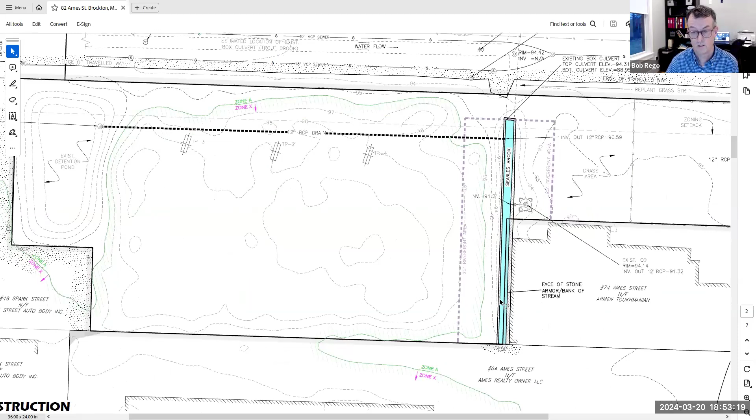So here's Spark Street and Ames Street, and the site is this irregular shaped lot. Searles Brook runs down the middle through that stone lined channel. There's a light gray line running along the perimeter of the property, and all of this area of the site is within Zone A. I determined the elevation to be 96 as the flood elevation. On the floodplain maps it's shown over here, but I think they were confused too, because Searles Brook is basically culverted beneath the ground for 1.5 miles upstream. It's all below grade and you can't really tell where the path of the stream is, but it does enter out here, and that's how I determined it.

What we're proposing to do is address the existing unpermitted gravel parking area, like a reprocessed asphalt parking area, at the intersection of Spark Street and Ames Street. We're proposing to redo that section with permeable pavement to allow stormwater to infiltrate into the underlying soil.

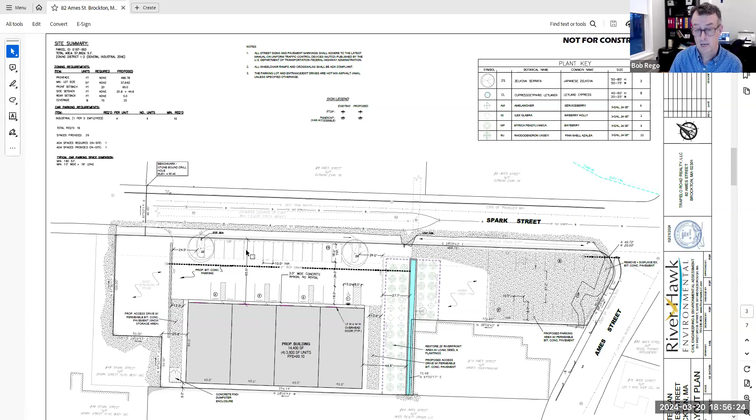In the front portion, that'll be regular bituminous concrete asphalt, going to a single catch basin at the low point, then directed through a water quality treatment unit into an existing basin on the westerly portion of the site.

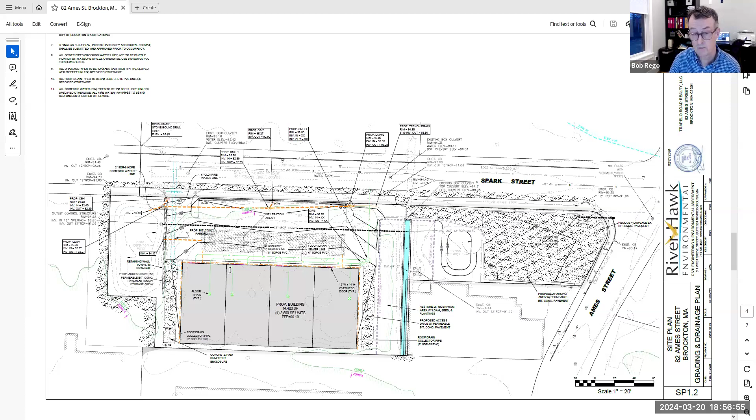All the roof runoff will be directed to a subsurface infiltration dry well in the front of the site, so that clean roof water is infiltrated into the ground right there. We've improved the infiltration of the site and managed stormwater up to the 100-year storm in accordance with Mass DEP stormwater management standards. That's about it, I guess.

And what would be overlaying that infiltration basin? That would be asphalt pavement. Asphalt over the top, yes.

And what's the condition of that retaining pond, over to the left side? It's in relatively good shape. It's just a grassed pond, kind of a little bit of a mystery why it's there and when it was built, but it does exist there.

There's an adjacent parcel with a limited amount of pavement which drains to it. That's an abutting property owner, so it's not their basin, but a small amount of water from their site does go to it. Other than that, it's interesting.

There's an overflow, and I'll go back to the existing conditions. Basically, there's an overflow structure in that basin, and it connects. There's an inlet on the side of it, in that granite wall. So it does overflow into the brook once it reaches the bottom elevation of that pond.

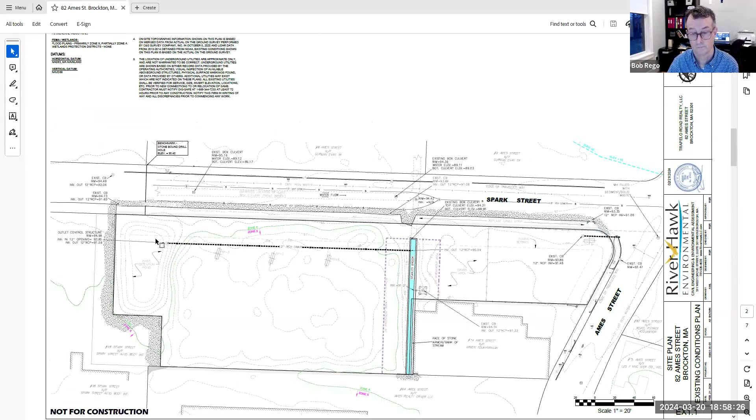Agent Holden? Sure, thanks, Joyce. Thank you.

Thank you, Bob, for that summary. I don't really have much to add to the site description. In my agent report, I reviewed the technical comments from DEP. I know, Bob, you did respond to Whitney, but that wasn't reflected in the agent report since it happened after I sent it out on Friday. That said, my recommendation still stands.

I think the commission should have Beta review this. There are stormwater standards that need to be met, and cut and fill calculations and compensatory storage that all need to be confirmed. So that's my recommendation. That's really all I've got. Thanks.

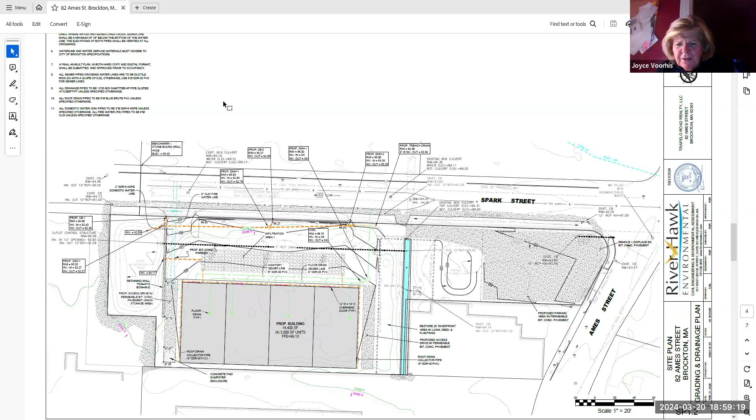Mr. Rego, I think I remember when you and another gentleman came before the commission a while ago, right? Previously, yes. Yeah, and I didn't realize it was going to be a building that was going to be built there. What would be the function, if you don't mind my asking?

He's probably on the line, Robert Toukhmanian, he could be promoted to a panelist. I believe it's going to be a contractor type base, like a metal building with roll-up garage doors for storage and office use, for a typical contractor type user, but he might be able to give you a better idea than me.

I've promoted Robert. Hello, good evening. Hi, how are you, how's it going? Fine, thank you. Yeah, so the main function of the building...

It's going to be four contractor units, contractor bays, for plumbers, electricians, storage. They're going to be rental units, for small businesses, anyone who needs cold storage or warehousing to support their business, for example HVAC companies or a plumbing supply company, something like that.

Do you expect many trucks being parked on the property? No, not trucks. We left side access for deliveries, but we're not anticipating 18-wheelers or tri-axles or heavy duty things like that, so nothing outside of pickup trucks.

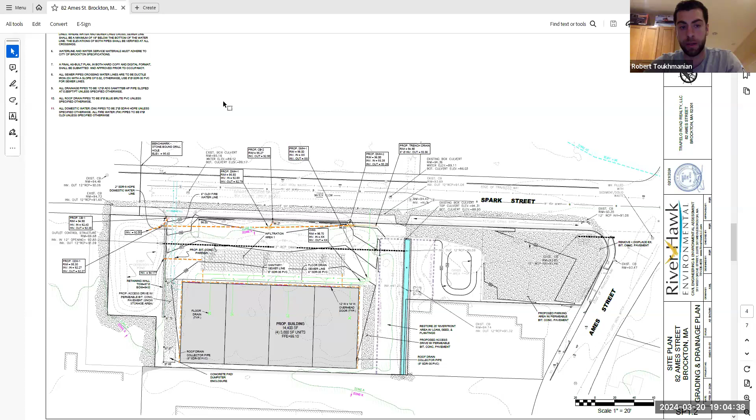Our main focus with this site is we just want to clean it up. It's been used as a dumping ground, and we just want to shape it up. We want to landscape it, bring some function to this site, make it usable, and get it out of the condition it's in now. We don't want it to be an eyesore and a dumping ground, so we want to utilize this and bring some life to this corner of Spark Street.

Thank you. Is there anyone from the public that would like to address this particular piece of property? Do you see anyone, Kyle? I don't see any hands coming up in the attendees. Okay, thank you.

Then I think we would entertain a motion to continue with a recommendation that be sent to Beta. Is that correct? Yes, thank you. I'll make a motion to continue to the April 17th meeting with the condition that Beta needs to review this. Is there anything else I need to add to that motion, Kyle? Nope, I believe that's it. Thank you.

Motion seconded. I just have a quick question though, are we also going to add the condition about the salt use? After we see what Beta has to say, and probably before we issue the order. Yeah, okay.

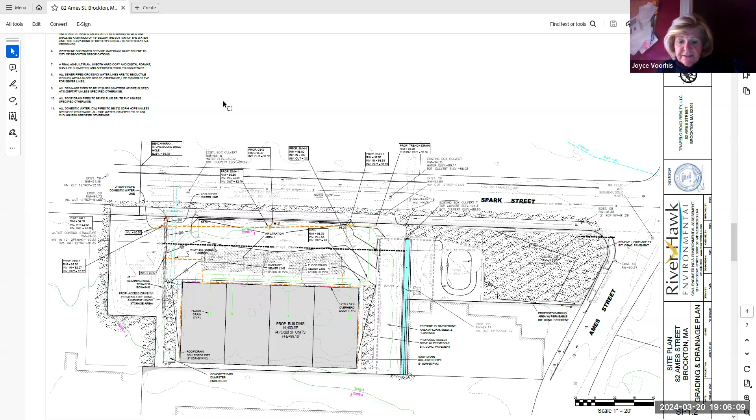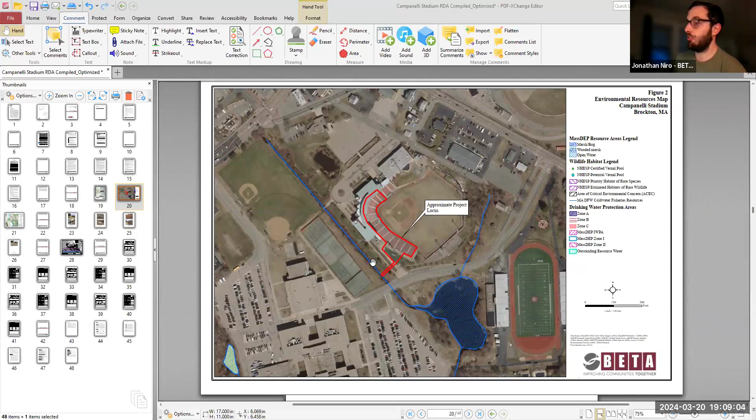So just to run through the existing conditions real quick before I get into the specifics of the project: the site is nearly all upland. However, you do have West Meadow Brook to the southwest, and you also have some associated fringe bordering vegetated wetlands along the north side of it.

So to show you from the plan view here in color - this is to the west of the stadium, just to orient you. You have the ball field up here, West Meadow Brook at the bottom of the page. We flagged bank and mean high water of West Meadow Brook, shown in blue, and also flagged an adjacent fringe wetland shown in green. What I have shown here in solid black is the Zone A 100-year floodplain.

The dashed indigo line is the 25-foot riverfront area, and the purple dashed lines here is the 25-foot no-disturb zone, and up here is the 100-foot buffer zone.

So I do want to give the commission's knowledge a general summary of the project, but I would note that only a portion of it is located in jurisdiction. Overall, what the project aims to do - I think the best way to think about this - is sort of a glorified sump pump system, something like you would find in a basement.

So to avoid any huge excavations, given that this is just an interim solution, what the city proposes to do is place structures strategically around the grandstand and dugouts. You can see one up here, and one up here, and all these circles along here.

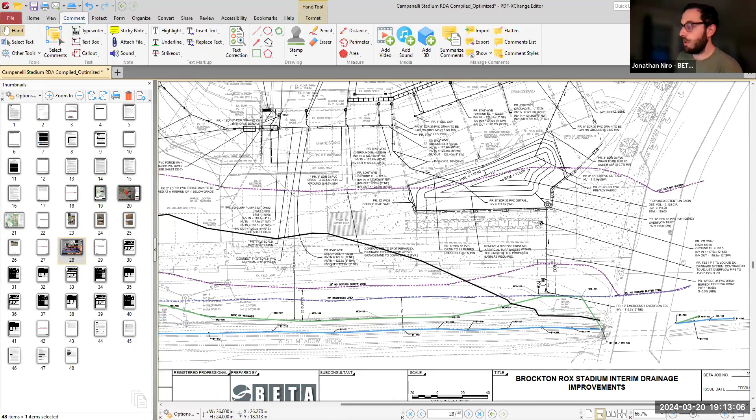I'm more than happy to take any questions or comments the commission has.

So will that last piece be sloped from, what's the height of the piping at the very beginning there at the top of that unit? So the idea here is, you have your bottom of your basin at 115 and your high water line at 118. So once it hits 3 feet of standing water, it will go into the structure. The invert out of the structure is going to be set at a little over 116, 116.8 is what we have it here. That will then flow out to this emergency overflow, which is at 116.5. So it's going to be a relatively slow release without a lot of velocity, which for these purposes is suitable, and it provides the benefit of a lot less potential for erosion at the downstream end.

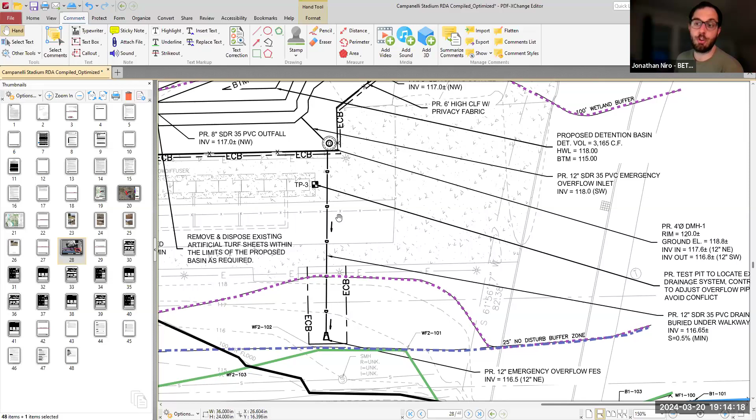Commissioners, any questions at all? I have a quick question. Are there any trees that are going to be affected by the outflow wherever this is running? Is there any vegetation or any kind of trees that's going to be affected?

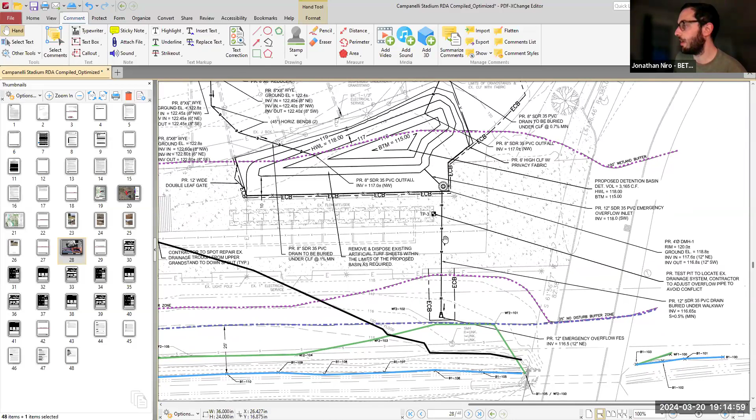Yeah, so not really anything in the way of trees. Vegetation that's out here is quite developed, as you can imagine. Essentially most of this area where this drain line is coming down, after the sidewalk, to give you a better idea here, you can see there are some sparse trees lining on the opposite sides of our work, but coming down through it's grass.

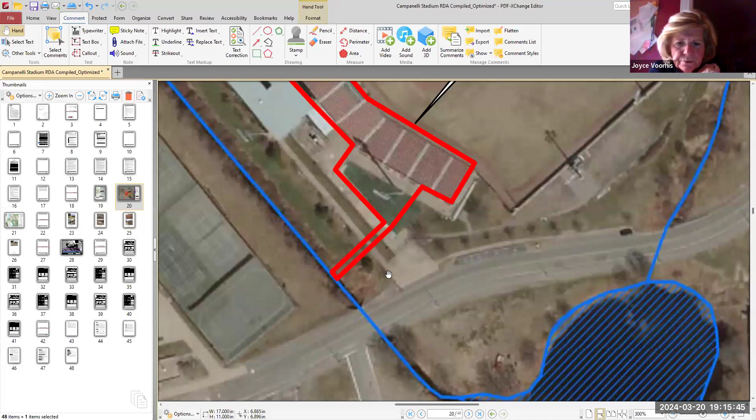The only real vegetation where we'd have to do some clearing is a pretty dense stand of Japanese knotweed there. So we did provide a note in the notice of intent that the contractor would need to properly dispose of it, and prevent any slashings from being thrown downstream into the river. I believe on that corner there's a huge copse of knotweed, usually by midsummer, I would say.

It's huge, yeah, some of the pictures I saw it was pretty tall. Looking at this, you can see a person for scale there, it's pretty tall. The clearing will be kept outside of the wetland, but yes, there'll be some clearing of knotweed, but I don't anticipate any removal of trees.

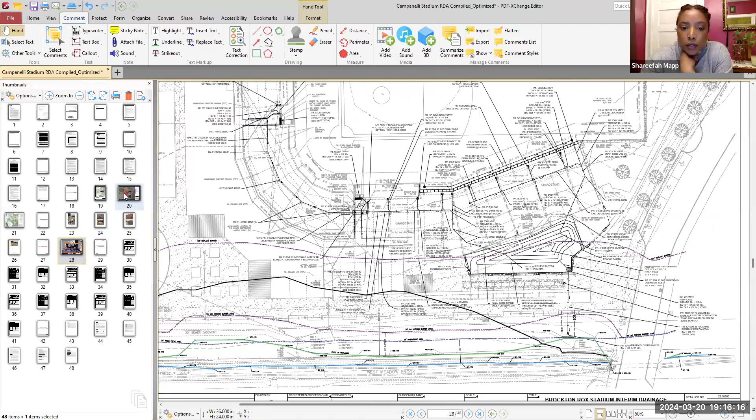Could you go back to that image you just showed? It looks like from the colored one, there is a tree on the right hand side. Is that a tree or no? Yeah, so that is a tree there. It does appear to be outside of our limits of work.

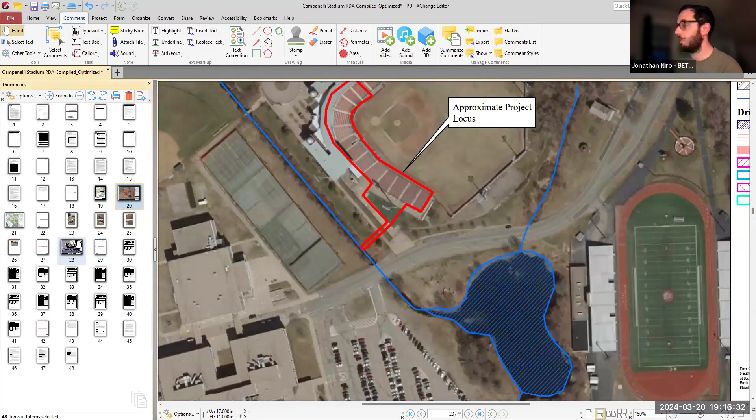Going back to the plan here, this is an older plan. I will say we did pull our existing conditions that this plan is based off of from some older city records, so at the time that tree probably wasn't there when this was actually surveyed, but looking at the aerial imagery, it looks like we would miss that tree.

If I may, concerning the trees, I noted the trees when I was out there, Jonathan, and I think you are correct that the limit of work for that drainage pipe will kind of go right through where I think there are 2 trees on either side of where that will be. And I think that this work can be done without damaging those trees, but I did put that in my comments in the agent report.

If we were to issue a negative 3 determination, the commission can also put some conditions on there, and one of the conditions would be that those trees are not permitted to be removed. Obviously they would have to be protected with the installation of this drainage pipe. Yeah, I think that's perfectly reasonable.

I had a question. What do you expect to be in the runoff, coming into the pumps? Is it just groundwater? I noticed it's astroturf, so you don't have to treat the lawn. I'm assuming, I don't know, so I'm just wondering what kinds of environmental things do you expect in that water?

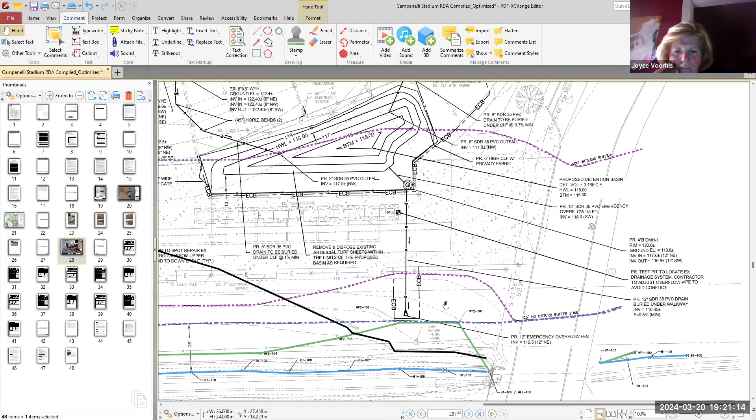What I'd imagine the contractor would do is come out based on this plan and grab some benchmarks, things like rim elevations of manholes, invert elevations, etc. They'd essentially set their own benchmark and elevation datum, working off an assumed datum for the site. And as long as all the proposed work shown is done relative to those elevations, that's ultimately what will make the project function, ensuring there's positive drainage.

A couple other things the city engineer brought up: one was requesting gravel be added at the final discharge location, which we had no problem with. That's at the ECB, where it says ECB, erosion control barrier. The trapezoid shape you see here, the flared end section, will be surrounded both on the sides and down-gradient with stone, just to slow the water.

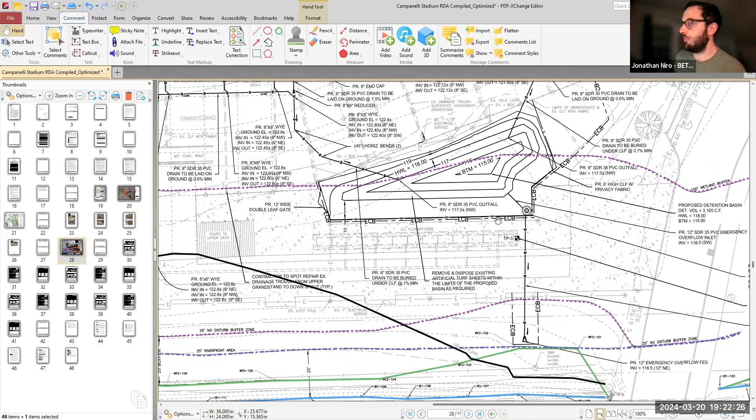The other big picture thing the city engineer brought up was he noticed all these angle points in the drain lines and asked for manhole structures or observation ports. Our engineers met him in the field and clarified, since this isn't a super common situation, that all those pipes would actually be laid above ground, so there's no need for any kind of manhole structure or maintenance ports, and the work is really just an interim fix.

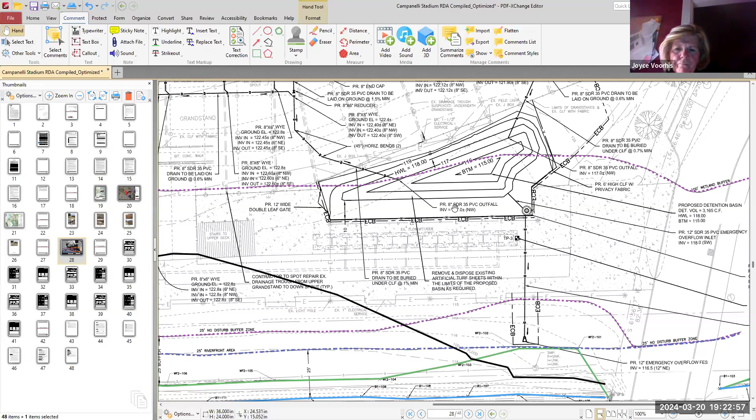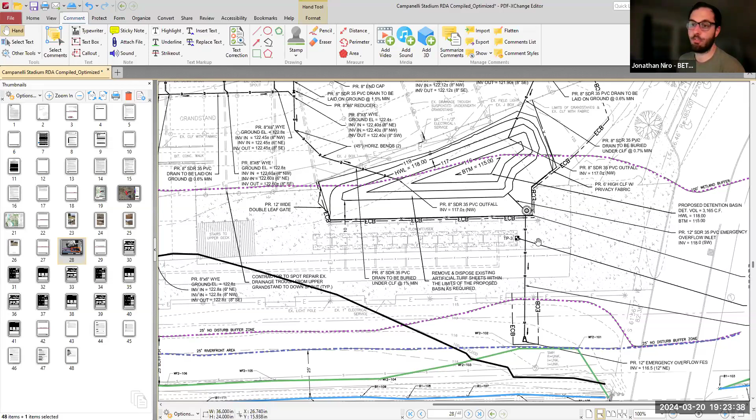The last question the city engineer had was about calculations of the actual pumping mechanisms, which we provided. I haven't seen any specific comments or issues with those calculations, but with regards to the commission's review and jurisdiction, and protecting the interest of the adjacent resource areas, the pumping data is, in my opinion, less relevant than the actual construction of the basin and the overflow to make sure water is released in a controlled manner. The calculations requested were more for the collection of stormwater throughout the stadium and how it gets to the basin.

We met with the city engineer in the field and went back and forth through a few emails, and there doesn't appear to be any big outstanding issues. So we were hoping to obtain a -3 tonight to allow the city to move forward with the contracting. That's my understanding as well, that all concerns have been met as far as the stormwater issues the city engineer brought up.

If you'll allow me, I'd like to read off what the -3 determination is, so the commission can decide if they're comfortable with it. A -3 determination in an RDA states that the work described is within the buffer zone but will not alter areas subject to protection under the act. So the work is all within the buffer zone, and we're saying it's not going to have a negative impact on the BVW or the stream that runs through there.

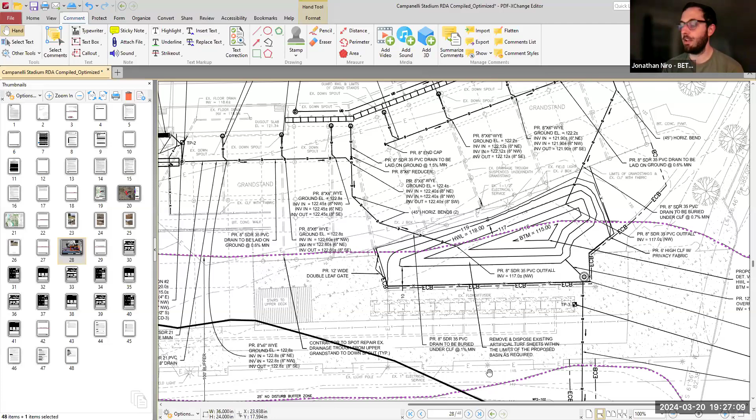You've been very helpful and very thorough. Thank you. You're welcome, absolutely.

Questions from anyone else? Laura, Ruby, Lily? Nope, I'm good. All good. Same. Okay, I'll entertain a motion then to issue a -3 determination with the stipulation that no mature trees be removed. Were there any other stipulations? Nope, just that it was the trees. Do we have to tell the public, do we have to get questions from the public on this one? I think we do.

Is there anyone from the public present to speak to this? I don't see any hands raised, Madam Chair. No hands? Okay, thank you.

So I'll entertain that motion then, to issue a -3 determination as stated. I'll make a motion to issue a -3 determination with the stipulation that no trees be removed. Seconded. Okay, the motion has been made and seconded.

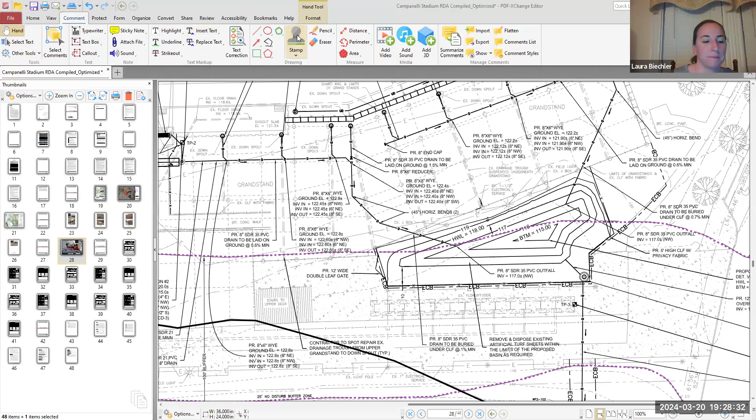Roll call vote, please. Equal, aye. Clay, aye. Curtis, aye. Green, aye. Matt, aye. And Voorhis, aye. That motion passes. Thank you, Mr. Niro.

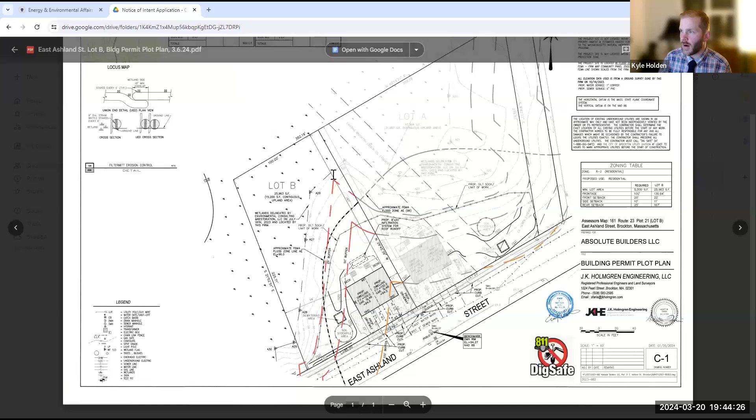What resource areas you see mapped here are the BVW that's been flagged. This first red line is the 25-foot buffer zone, this next red line is the 50-foot, and this orange is the 100-foot buffer zone. This dashed bold line is the FEMA mapped flood zone. But if you look at the existing condition elevations on the map, in light gray, you'll see elevations of 95 here. So basically, like the previous application, the entirety of this site is below that flood zone AE value of 96 feet—the whole site is within the flood zone.

Similarly to the last application, there's an infiltration unit proposed in the back to take the roof water runoff. This is also a duplex. One deck is within the 50-foot, the other deck is outside. The limit of work is outside of the 25-foot buffer zone. This will include associated grading and utilities—basically the same report I issued for the previous property.

I did want them to split these into two different filings, because when this property is eventually sold, the order of conditions should be tied to a specific property rather than one order of conditions for multiple properties. That order of conditions should follow that property through multiple ownership changes, basically indefinitely, and that makes things a little easier down the road. Any questions for me on this property?

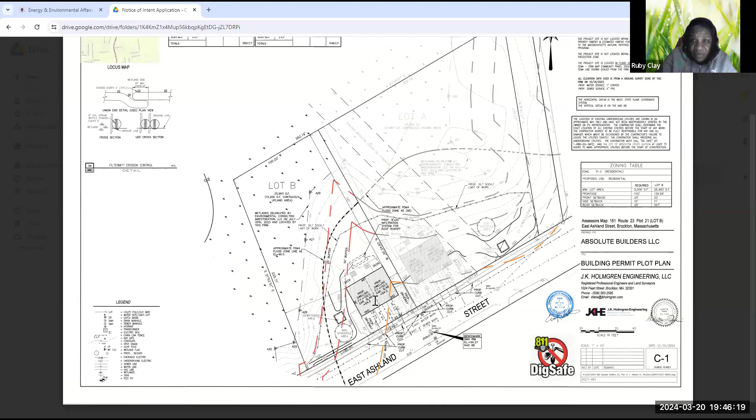None, I think. Stockpile, it follows along with the same, with the A property, so I'd have the very same concerns with B. And it's coincidentally the same recommendation that we have Beta review this for compliance, with cut and fill and everything with the flood zone.

Any questions at all, Will or Laura? No?

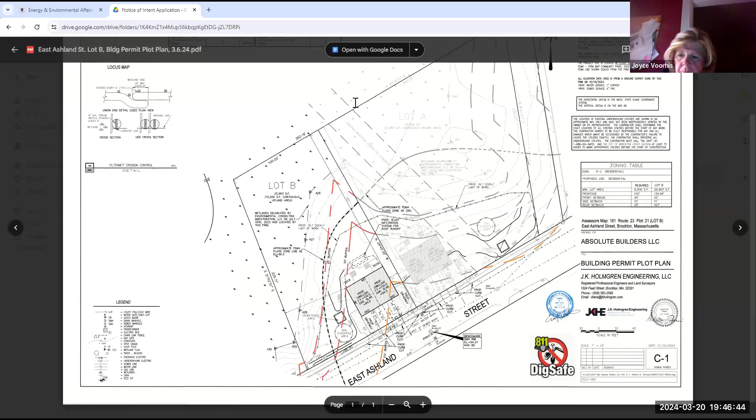Okay, then I'll entertain a motion to continue to the next meeting with referral to Beta. Perhaps we should open the floor for public comment. I don't know that we'll have any new public comment, but just to be thorough.

Is there any member of the public that would like to speak to this? Just me again, Deb. It's the same exact project, please just record us as well and put the letter on the file as well on this property too. Same exact concerns for us. Thank you. Okay, thank you very much. Thank you, Kyle.

Okay, so I entertain a motion then to continue to the next meeting with referral to Beta. I'll make a motion to continue this to the April 17th meeting with the stipulation that Beta review 0 East Ashland Street, Lot B.

Seconded. Okay, that motion's been made and seconded. Roll call vote, please. Declare, I. Clay, I. Curtis, I. Green, I. Map, I. And Voorhis, aye. That motion passes. Thank you.

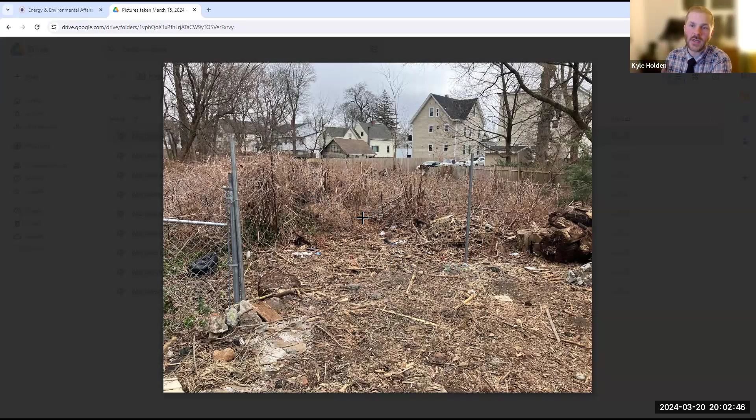But this is the adjacent property, 24 Howard Square. They basically removed the material that was problematic there. We can finish getting this polished up. But they've done a lot to bring this into compliance, or at least come into compliance with what we asked them to do in the enforcement order.

So here's the flags that I went out there with. They moved everything, most everything, to the upland side. The bank is over here by where this shoulder is. You can see they have a few things here by the fence, this kind of tarp thing. But these things will eventually need to be removed.

I think the idea is that they have this chain link fence here, and there's a chain link fence on the opposite property bound behind where I'm standing. I think the idea would be maybe to put a chain link fence across this area.

I've communicated with them that they're not allowed to farm back here. They can't have a garden within the riverfront area. All the pesticides, herbicides, and fertilizers they add can easily get into that waterway, so we want them to not be using that area for a garden. As part of the notice of intent filing, if they go with that, we can require that they restore this area, put some native plantings down, and stabilize it.

So here's where the lumber is stacked up, and this is supposedly a barrier to keep the children out. I recognize that we don't want anyone drowning back here. So, one way or another, this needs to be removed, right?

If they go with a notice of intent filing, I think we can maybe allow them to keep this in place until that filing is worked through. Otherwise, this will have to be removed. Another alternative could be just to move this pile closer to the home, so it's outside of that 25-foot riverfront area. That's really up to them. I was hoping they'd be here tonight to have this discussion with the commission, but I will follow up with them. They are willing to work with us, but that's how things stand at the moment.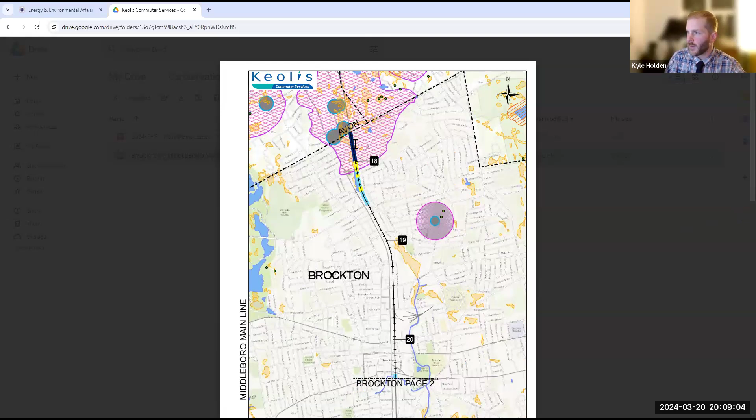There are two maps here. Up here along this rail line you can see the light blue, the yellow, and the dark navy, along with the different resource areas mapped. The light blue is a limited spray zone on a 1-year basis, the dark blue is a limited spray zone on a 2-year increment, and the yellow is a no-spray zone, right by the resource area rather than in the buffer areas.

It's the same thing down here on this other map, on the south side of Brockton. You can see right where the stream crosses the rail line, it's a no-spray zone, but on either side of it they have a limited spray zone. So that's kind of what they're doing.

Kyle, who monitors their spraying and whether they're following those regulations? Yeah, that's all internally reported, it's up to these utilities to monitor themselves. But they do this kind of work all over the state, and they're only exempt when they follow these regulations and best management practices. If they were found not doing that in Brockton or anywhere else, that would be a big problem for that utility, so for the most part it's in their interest to follow those practices.

There's no one from the commission keeping an eye on this, but if someone, like Joyce mentioned, calls and says they see some problematic things, we could certainly check in on that. DEP doesn't...